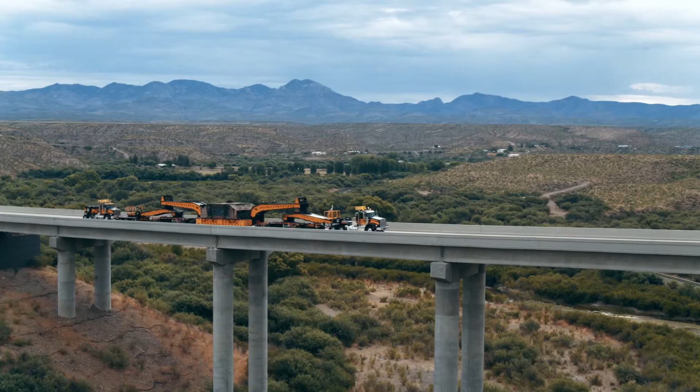AASHTOWare BRD and BrR products are part of the AASHTOWare suite of transportation products. They're developed, supported, maintained, and enhanced between several experts from AASHTO member agencies. This partnership works out for everyone because it keeps costs lower than custom or individual development. We all get to pool our knowledge and our resources, and all of our members verify and validate the products. We like to say that the software is developed by DOTs for DOTs.

Hey Todd, how you doing? Good. Thanks for helping out with this.

No problem. I mean, you've been on the task force for a while now. Yeah. I was involved with the AASHTOWare bridge rating products back in like 1989, 1990s when I got involved as a user. And our goal at that time was really to create a database of everything you need to do a rating of a bridge, because we thought that was the most expensive part for states to create, was all the data. But over time, we realized that we needed at least one engine to have in the product. So it kind of grew from more than just the database.

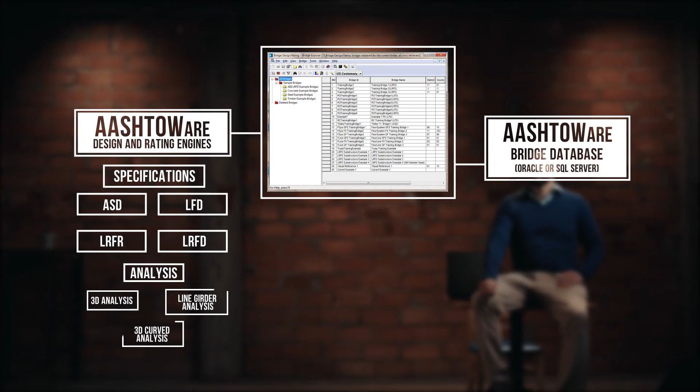First, the graphical user interface is used to build the 3D model of the bridge. Second, the database stores a 3D model of the bridge, and this can be either Microsoft SQL Server or Oracle. Third, the design and rating engines can use specifications such as ASD, LFD, LRFR, and LRFD. Analysis, 3D line girder and 3D curved analysis. Fourth, third-party engines can be utilized with the AASHTO product for analysis. And finally, import utilities can pull bridge data in from other sources.

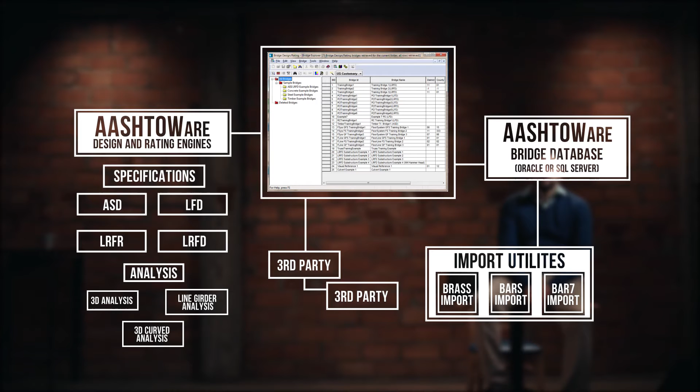I've used BRD almost from the beginning. I've been working for KDOT for over 30 years. It's been a go-to tool. So what features do you guys use out in Kansas? Well, I think some of the most important features are the ability to, once the bridge is coded in, look at multiple scenarios. We still load rate, load factor design. So that's an option. Design LRFD, looking at different specs, being able to load rate it in LRFR as well as LFD. You do a lot of what-if scenarios.

You don't have to code the same data into multiple software engines. I mean, you can just choose a different engine, choose a different spec version. So it makes that lots easier to do. And how do you guys get value from the software? It follows the AASHTO specs, and it also has multiple versions of the AASHTO specs. So if you want to check to see what changed from last year to this year in the specs, you can easily run the two versions and see what changed. So that's been good to evaluate changes in specs.

We have limited staff with the load rating section, so being able to save time, we just transfer the file to them. They don't have to recode the whole bridge. So that same database is used to load rate for permit trucks and overweight vehicles as well.

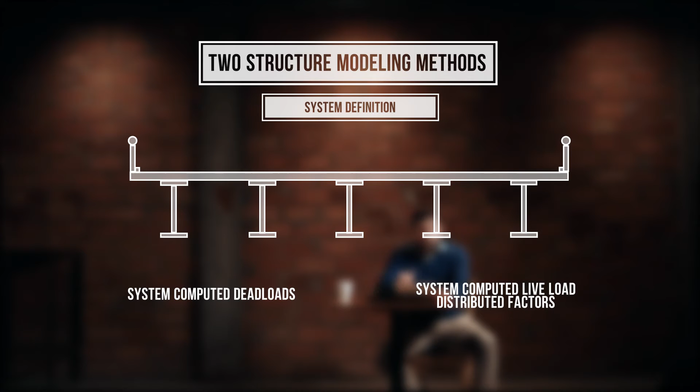Superstructure modeling methods. System computed dead load and live load distribution factors. System definition is a method of entering a superstructure by describing all of the girders in the framing plan, including the position of each girder within the overall superstructure. System definition allows the analysis engine to distribute the typical section load and compute the live load distribution factor for each girder.

User-defined dead loads and live load distribution factors. Line definition is a method of entering a superstructure by describing just one girder where no relationship between the girders is defined. User-defined live load distribution factors are used for the analysis.

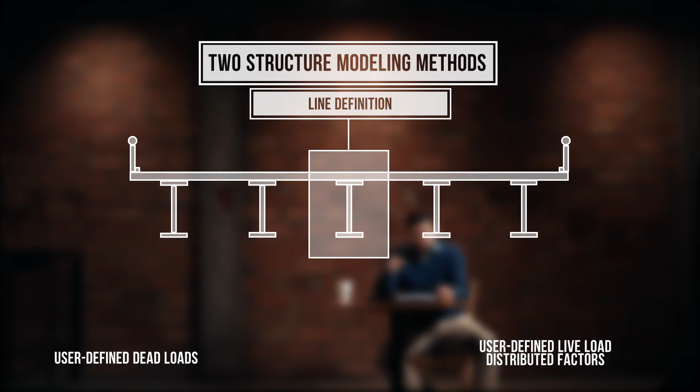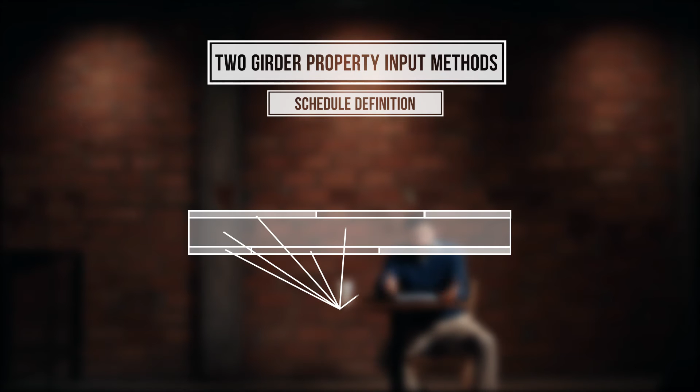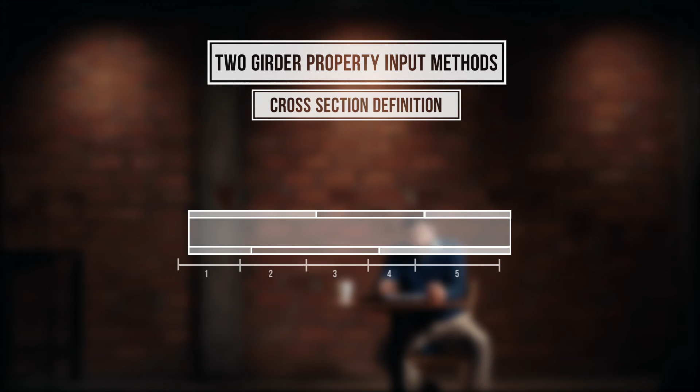Two girder property input methods. Schedule definition. Schedule-based input is a method of entering data about a girder by listing and describing all of the parts individually. For example, you can describe the web plate, flange plates, stiffeners, and cover plates individually, including their size and position within the girder. Cross-section definition. Cross-section-based input is a method of entering data about a girder by selecting a number of points along the line of the girder and describing the cross-section at these points.

Typically, the points will be selected at places where the cross-section changes, such as where a cover plate begins or ends.

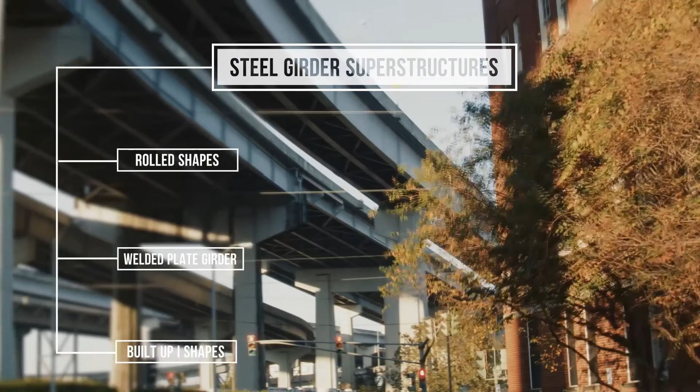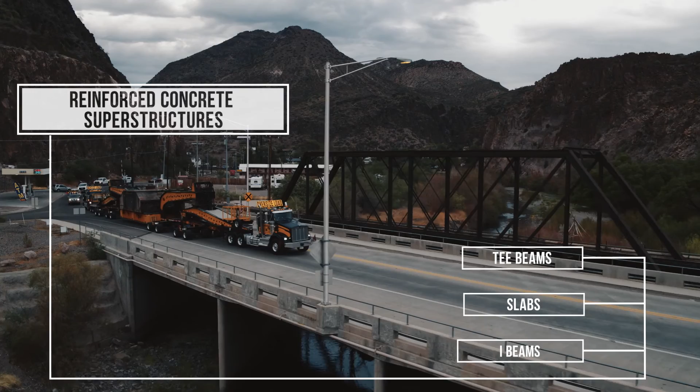This one, we're going through the specification check and load rating on different types of bridges. AASHTOWare can load rate a large variety of bridge types, including steel girder superstructures, prestressed concrete superstructures, precast shapes, reinforced concrete superstructures, reinforced concrete slab system superstructures, reinforced concrete multi-celled box superstructures,

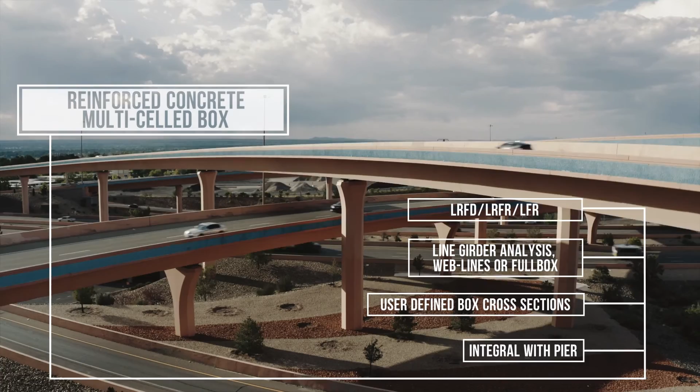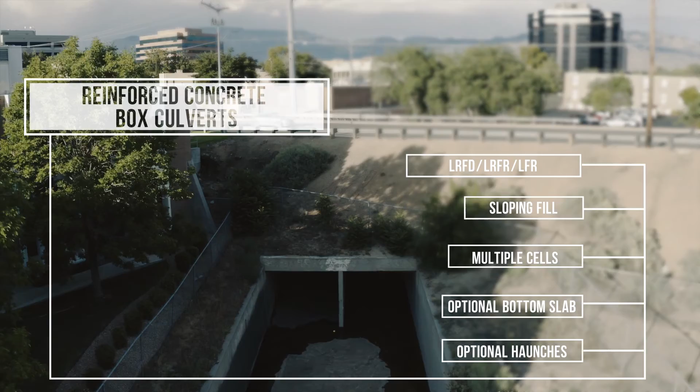reinforced concrete box culverts, 3D analysis used for multi-girder straight and curved systems, automatic mesh generation with user controls, dead and live loads, transverse live load analysis, or user-defined vehicle loading path.

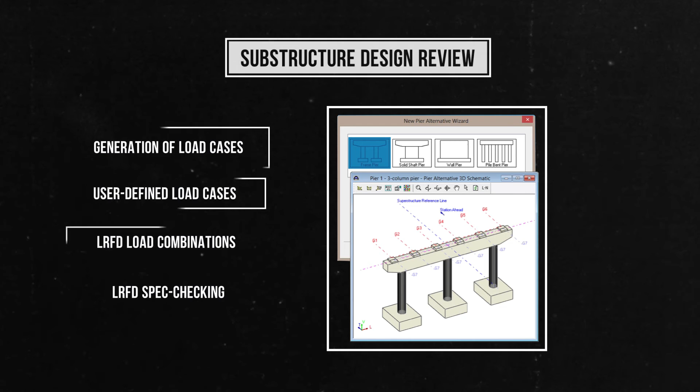And now the design tools included with AASHTOWare. Substructure design review, including generation of load cases, user-defined load cases, LRFD load combinations, and LRFD spec checking. Substructure design review, including foundation types like spread footings, pile footings, single drilled shaft. Design tools, prestressed, utilizing shear stirrup design tool, shear stud design tool, and flange to web weld design.

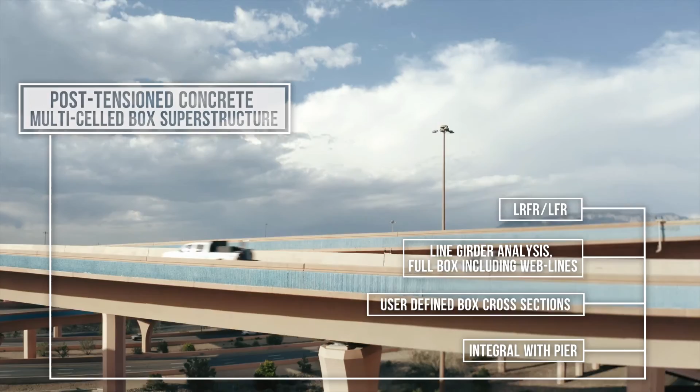The software has extensive load rating capabilities, including post-tensioned concrete multi-celled box superstructures utilizing LRFR, LFR, line girder analysis, full box including web lines, user-defined box cross sections, and integral with piers. Floor system utilizing LRFR, LFR, and ASR. Floor systems utilizing LFR or ASR.

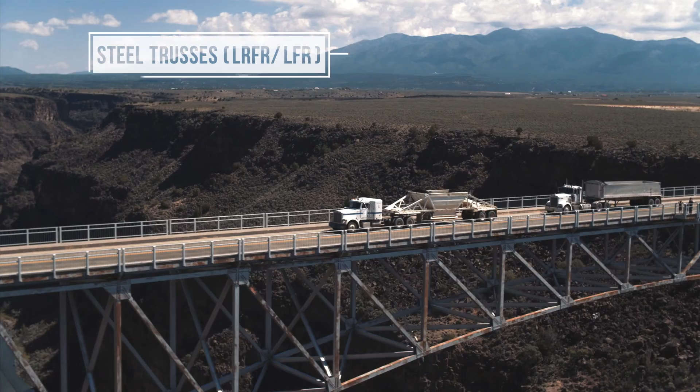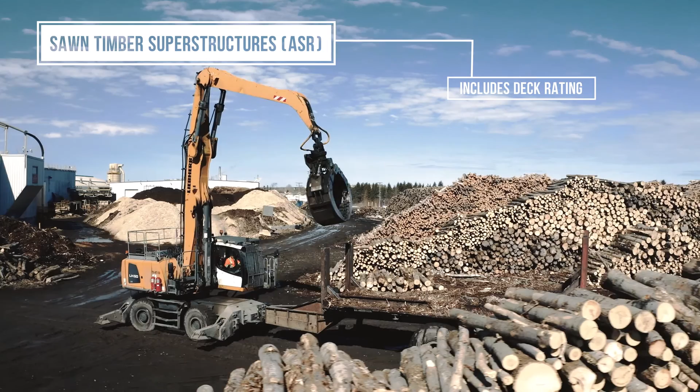Steel trusses utilizing LRFR and LFR. Continuous spans, suspended spans, counters, deck trusses, through trusses. Sawn timber superstructure utilizing ASR, including deck rating. Graphics, verification of input and analysis results.

Yeah, nope. I still won't be able to see your screen or what's coming from your camera either. Okay, so let me see if I can share my screen right. So can you see my face? Yes. Okay, I think we got it.

So, you work for ProMiles, right? Yeah, right. We work with AASHTO in developing AASHTOWare bridge design and rating software. All right. Go ahead and take it away.

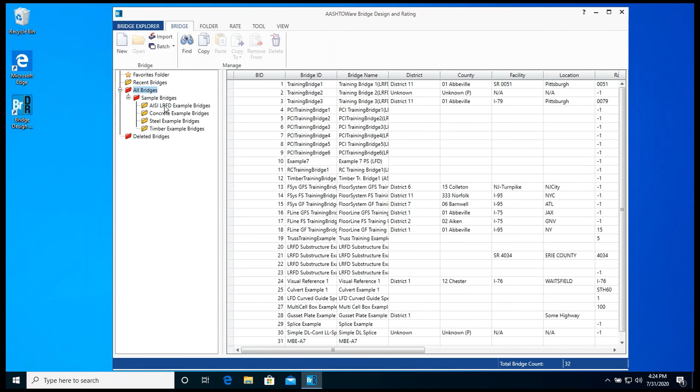Okay, sounds good. Bridge Explorer displays a list of bridges which are organized into folders. And working with a bridge inside Bridge Explorer is like working with a file in a file explorer in Windows. Bridge Explorer also allows you to find a bridge, import a bridge model, batch export a bridge model, or batch export a bunch of bridge models. You can also rate multiple bridges through Bridge Explorer.

Library Explorer allows you to define predefined shapes, factors, and vehicles based on standard specifications. It also allows you to define your own shapes, materials, and vehicles to be used in multiple analyses. Configuration browser allows you to edit users, user groups, and add access privileges. Parameters allows you to edit a certain area where the bridge is located for districts and counties.

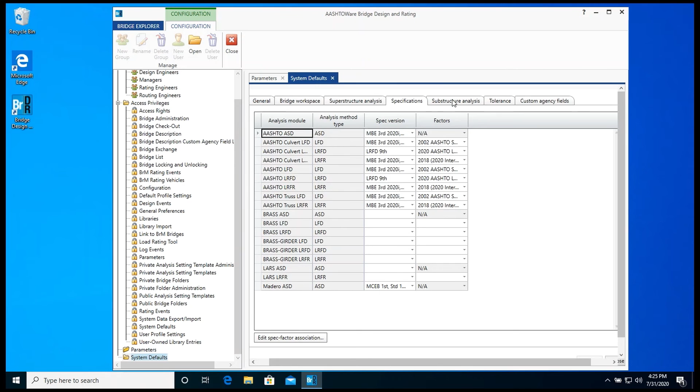System defaults allows you to edit default values that will be used in bridge workspace, the line girder analysis engines or 3D analysis engines that will be used by default, and different factors related to a certain specification. The bridge workspace: you can model your bridge inside the bridge workspace. You can also analyze the whole bridge or individual analysis members through the bridge workspace.

Great. I think we got it.

Being a part of this agency-led software really helps; you have input into it so that if there's something you really want to see changed, you have the ability to change it or to add to the software. So that's a very big benefit for states. In the past, we were having to be very conservative so we wouldn't have some kind of a failure.

Why do we have the highway system? It's for mobility. And if we're having to send trucks 100 miles out of the way in order to avoid a bridge, then we want to have justification for doing it, not just because we're a little concerned that it might not make it. That's not the right answer. We either know or we don't know.